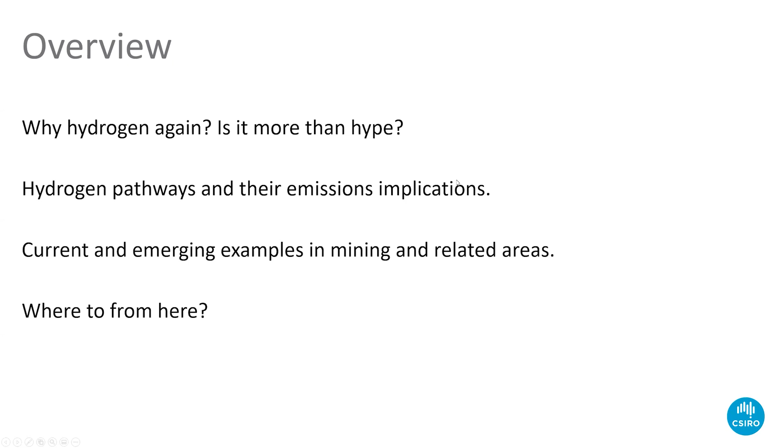This is the overview of what I'm going to step through today in this info call. People often want to know why we're talking about hydrogen again, and if it's real this time. Is it more than hype? I'll take you through what I think is the answer to that question. I'll talk a little bit about some of the pathways that are emerging, their different implications with regards to emissions, and how some of those are panning out in some of the sectors of relevance to the people who might be dialing in to listen to this. We are a research agency, and so we do like to finish these discussions with where to from here, because we wouldn't be heavily invested in spaces which were ready to go and didn't have any more work to do.

So hydrogen energy systems, depending on what you've been doing or where you've been casting your mind, have been around for quite some time. But really, their use in an industrial scale has been as a feedstock for many years, 100 years or perhaps even more. And that industrial hydrogen use has been largely in sectors around oil refining, production of ammonia for fertilizers and explosives, methanol production, and a whole range of other applications. In those scenarios, it's usually produced in the industrial complex, in the oil refinery, in the Haber-Bosch plant, for example, where it's needed. And that production is usually from steam reforming of natural gas or the gasification of coal. And that has associated with it a lot of CO2 emissions.

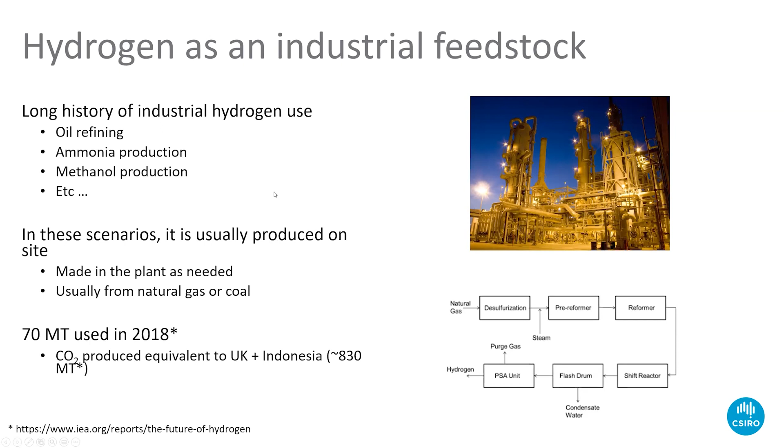And when we talk about hydrogen in the modern energy context, we're talking about hydrogen for different uses. Although, as we move down the decarbonisation pathway, those existing applications of hydrogen have the chance to contribute to emissions reduction as well. Hydrogen energy usually leads people to think about mobility, cars, perhaps buses if they've been in a city which has had a bus trial in the last decade or so. And that's certainly the case, but it's much more than that now. And it transcends industry sectors.

It links into domestic use, electricity and grid uses, a whole range of industrial uses, and of course opens up this prospect for countries which are endowed with significant renewable resources to store and export that renewable energy as the world seeks to decarbonise. So it's broad and it's complicated, and almost every sector that has energy and emissions associated with it has a chance to have at least some benefit from what's emerging in the hydrogen area.

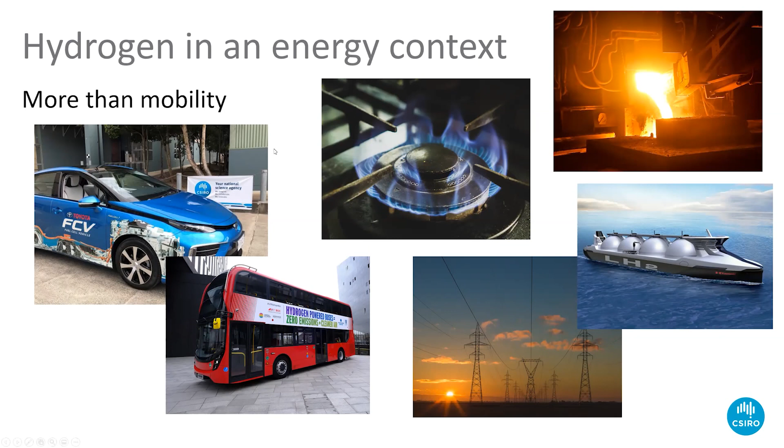Why, though, are we talking about hydrogen again? And depending on how long you've been around, will depend on how many times you've had hydrogen thrust upon you as a solution. Many of us think it's different this time, and a few things have changed, I think, to support that.

One is this notion of global market pull. Japan and Korea, for example, have got energy strategies which rely heavily on imported low carbon hydrogen to achieve those goals. Germany even wants to look at importing renewable hydrogen from Australia as part of its plans to transition and decarbonise.

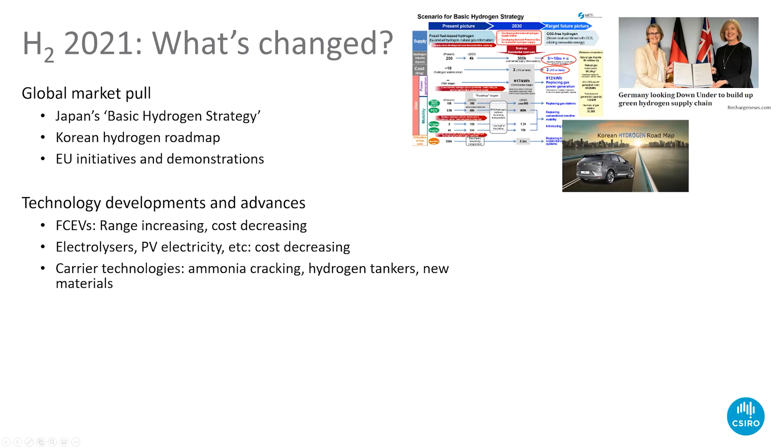And these strategies are emerging because we're seeing fairly mature technologies in some key areas. Fuel cell electric vehicles: the fuel cell itself has become efficient and light. The tanks to store the hydrogen, some of the materials advances there have been quite significant. And we now see fuel cell electric vehicles on the streets in cities around the world.

Making the hydrogen from non-fossil fuel sources has also become achievable in terms of the cost of electrolyzers, in particular the PEM electrolyzers, which are somewhat flexible and modular and distributable in the context of renewable energy and grids. And we, of course, know that the costs of renewable electricity generators have come down significantly.

I guess the other aspect of that is this notion of storing and moving it around. And we've seen some technologies emerge there around liquid hydrogen tankers, new materials for storage, ammonia pathways are now real. And this opens up the prospect of storing and moving the hydrogen around at costs which are now in that range of being on the trajectory, I guess, for many strategies and plans.

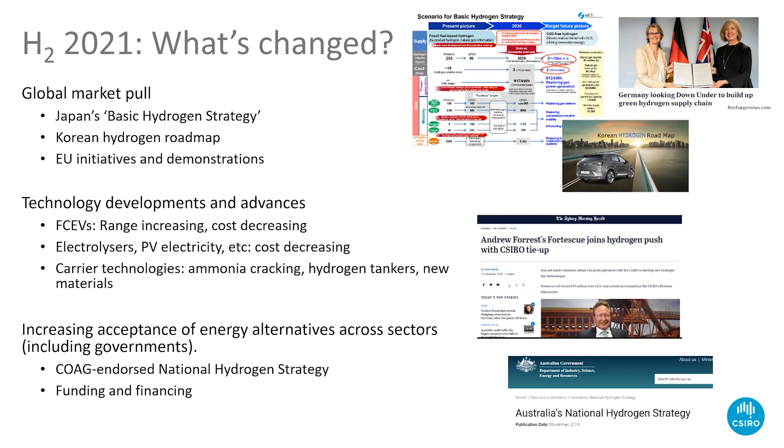And this is all happening in the context of a bit of a shift, I think, in what people want to see in terms of the emissions intensity of their energy. This is reflected here in Australia, where there is now a national hydrogen strategy endorsed by all of the states. The federal government is supporting hydrogen demonstration through grant funding and investment activities through our so-called Green Bank.

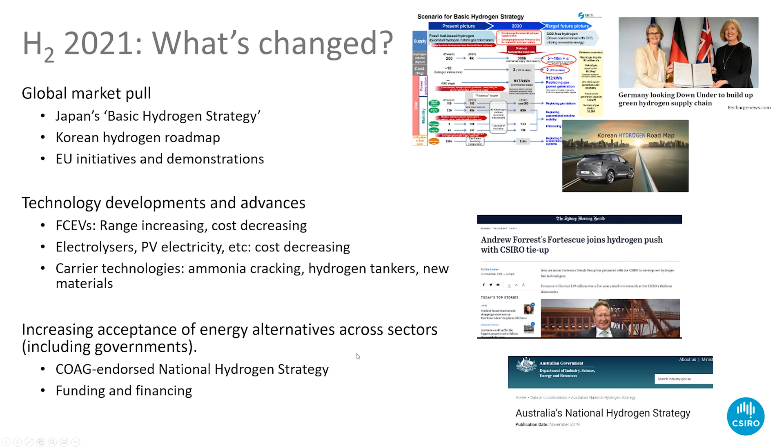And we're seeing companies such as Fortescue quite famously pivot from being an iron ore company to a company with ambitions to be a global scale green energy company. And so all this together really does make many of us think that this time it's probably for real.

It's worth touching on the different pathways available to us. The pathway for hydrogen production that I mentioned at the outset, where we make hydrogen from gas or from coal, is nowadays called grey or black or brown, depending on which version of gas or coal it's made from. That, of course, is not usually consistent with the notion of hydrogen as a clean energy transition option because of the CO2 emissions associated with it.

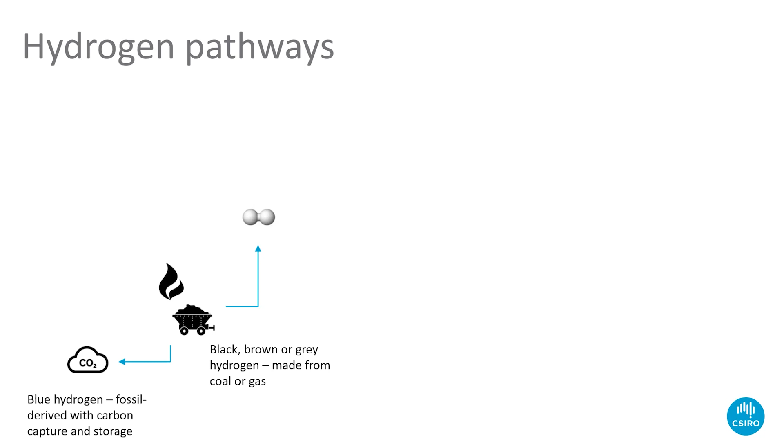And so if those emissions are to be captured and stored or used, then the hydrogen produced is called blue hydrogen. And there's a lot of interest in blue hydrogen, in particular from natural gas companies who are trying to figure out how best to navigate a future which is likely to be featuring hydrogen significantly.

I think most of the interest, though, in terms of hydrogen as a long-term decarbonisation vector is what's called green hydrogen, which is hydrogen made from renewables. Now, most of that is renewable electricity driving an electrolyzer to make hydrogen. There are some pathways where we can take renewable waste streams such as agricultural waste or wood chip waste or even urban waste and turn that into hydrogen. But certainly most of the interest is around this electrolysis pathway.

And that's where we're seeing a lot of advances in electrolyzer technology, in terms of cost and scale. And that's going to continue to go down and increase respectively as we see more and more deployment. Once you've made this hydrogen, of course, we can do lots of different things with it. It can be used as an energy storage pathway.

It could function in a grid a bit like a battery, but for much longer storage timeframes and potentially longer generation timeframes as well. And I guess the benefit there is twofold. Electrolyzers are pretty flexible loads on the grid, so they can actually be used to help balance out demand by turning them up and down as renewables come and go, but also as a generation pathway in its own right.

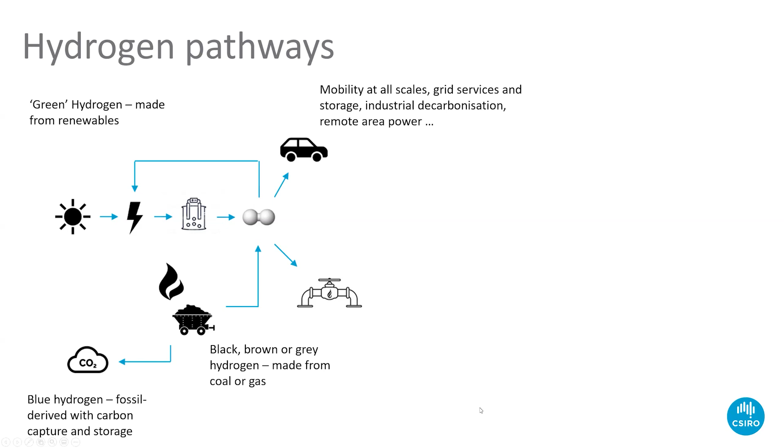And of course, there's this notion of storing hydrogen, either as ammonia or methanol or methane, liquid hydrogen or organic hydrogen carriers. There's a whole range of options here, and transporting it around the world. And the prospect of a renewable energy export industry is really piquing the interest of many in this space.

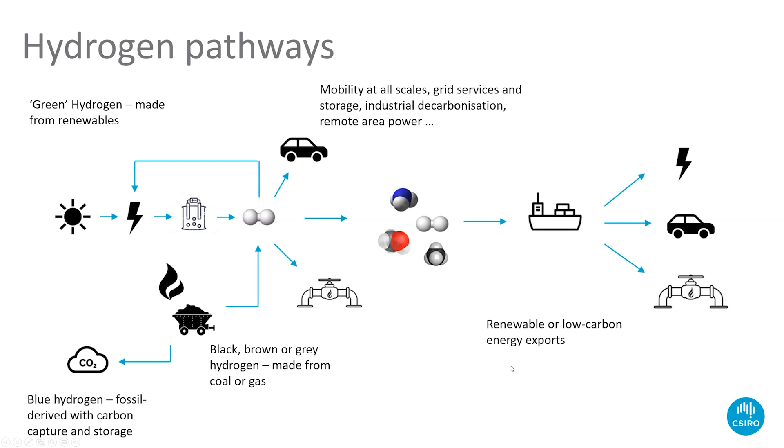When we turn to mining, that story is consistent, and there are some really interesting things emerging in this space. I don't think anyone tuning into this session will not appreciate the energy demands of mining, and especially in Australia, where we see a lot of use of diesel, which, especially when we consider the remoteness of some of these mine sites and the off-grid nature of them, is very costly, it's quite CO2 intensive, and there are other issues around the use of diesel, which go beyond carbon and cost.

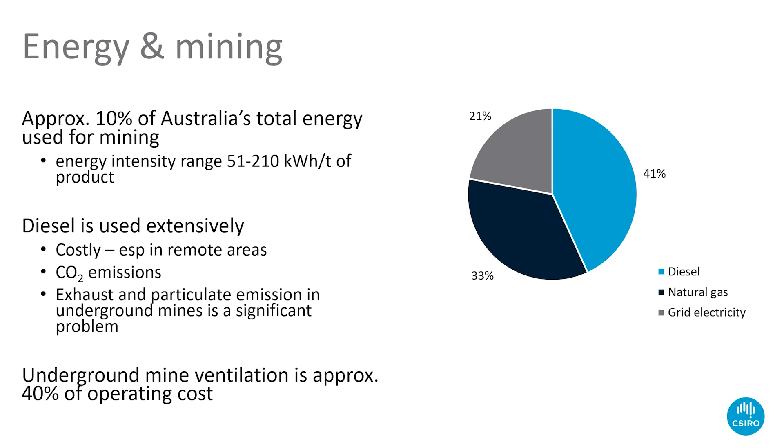And so we are seeing some early movement in the mining sector around uptake of hydrogen technologies. And this is in part because it's a fairly high cost competitor in that space already. I think some of the applications for hydrogen, where the incumbent has a smaller margin associated with it, things such as natural gas replacement in some manufacturing industries, might take a bit more time and might need the costs to come down. But certainly mining is amongst the early movers in this space.

And we see that in things such as the development of hydrogen-powered mining trucks. There's some conversion projects going on around the world. This is particularly amenable to those trucks which are the hybrid diesel electric drivetrain, and that has an analogue in rail as well, where we're seeing some conversions and some demonstrations, in particular in Europe, around hydrogen-powered rail.

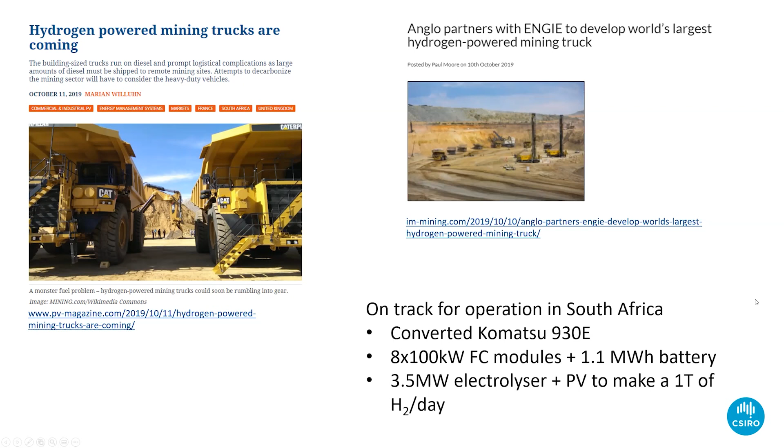The prospect of producing the hydrogen on site and using it to power some of these very large vehicles is really quite interesting. Here in Australia, we're seeing some early movement by Fortescue, not so much at the moment, at least, in their large heavy haul vehicles, but they are now going down the path of using hydrogen in some of their coaches for moving people around their sites.

Now, it's a fairly useful place to start, I think, as they develop their own familiarity with some of the technology combinations needed to deliver a renewable hydrogen transport fleet, and also allows them to build on some really strategic partnerships with various players in the hydrogen space, including, of course, CSIRO, as they partner with us to commercialise some key technologies across the value chain.

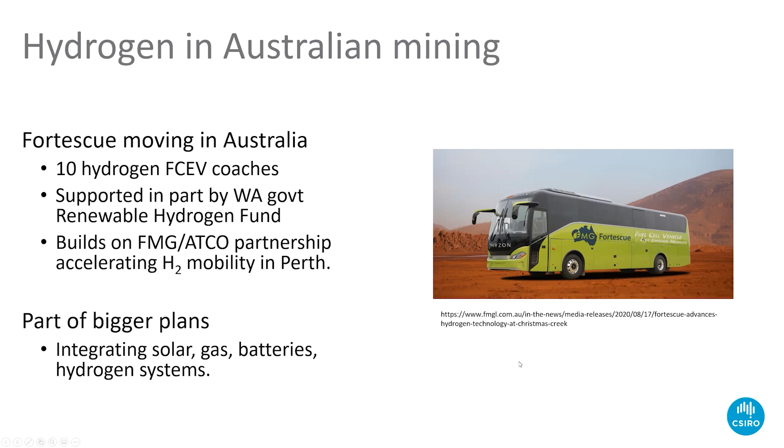I always like to show this example when I'm talking about mining, and even more broadly hydrogen, because it shows that we're not necessarily talking about a competition here between different storage technologies or different mobility technologies. And the future really is in looking to all the technology options that are available to us and hybridizing them to find the sweet spot. And the Glencore Raglan mine up in Canada, I think, is a great example of that.

It's got a couple of megawatt scale wind turbines in, I think, a 29 or 30 megawatt microgrid, which runs the mine. And those wind turbines are hooked up to a multi-technology energy storage system, which of course has a hydrogen system, like I touched on earlier, with an electrolysis and a storage component, along with a fuel cell generation component, but also a flywheel and a battery.

And together, those three approaches to storage really do offer them the reliability and flexibility to show how we can integrate some of these technologies with intermittent renewables and have a big impact on things like, in this case, millions of litres of diesel a year. So I think that's a really great story, and there are analogues for that, I suspect, all around the world.

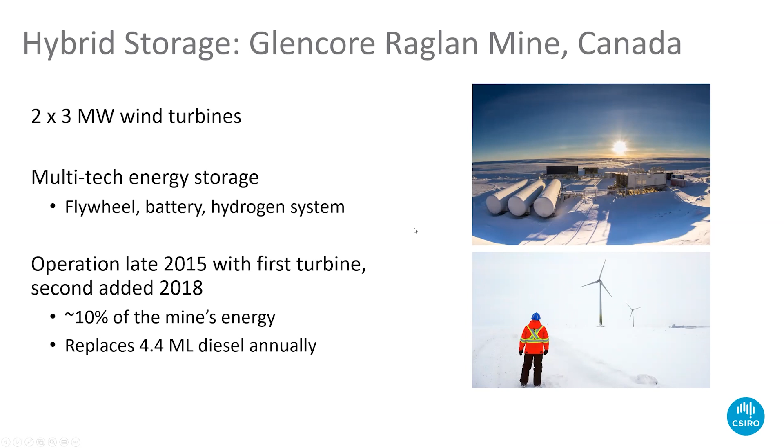People do talk a lot about green steel, and that's certainly a tantalizing prospect. I think more broadly, the iron and steelmaking sector can benefit a lot from some of the opportunities that hydrogen affords, not just in the steelmaking itself, but also more broadly. And I think some of the quality increasing activities around iron ore beneficiation, which rely on natural gas and thermally driven processes, are fairly amenable to conversion to hydrogen.

The traditional steelmaking path using a blast furnace, we have seen coming out of Europe already some demonstration activities of hydrogen being used, but of course, blast furnaces are difficult to go green, as it were, because of the reliance of that technology on coke and some of the carbon implications of that. While hydrogen is a very good heat source and a very good reductant, it's difficult for it to fulfill some of those structural properties of coke in the blast furnace. So there's some other innovation required there.

But certainly by using hydrogen to increase the quality of what goes into a blast furnace, and perhaps in the tuyeres as a heat source, which is what we've seen in Europe, there's an opportunity for some quite significant CO2 reductions. The emerging steelmaking pathways, such as electric arc furnace, linked up perhaps or separate from direct reduction of iron, are very amenable to hydrogen. These low temperature reductions are quite suited to hydrogen, given its strongly reducing nature. And of course, when linked up with an EAF run on renewable electricity, that's where the opportunity for zero emission steel can be realised. So lots to think about there.

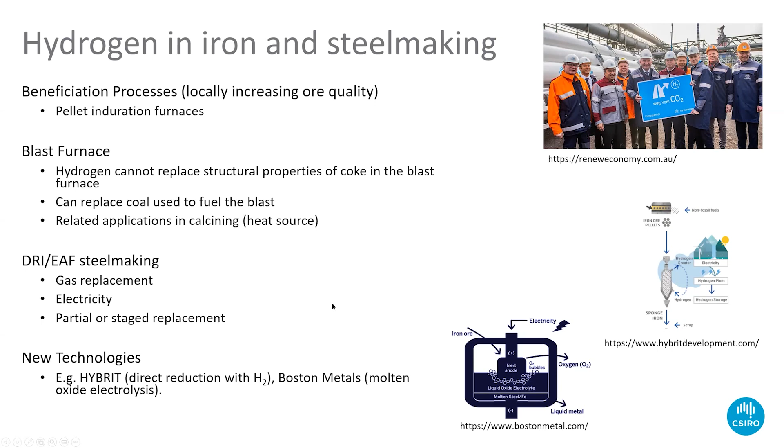Gas networks, I've stuck in here because it shows how it doesn't need to be green or nothing. Some of these demonstration projects here in Australia are taking green hydrogen and injecting it into natural gas grids at a few percent, just to become familiar, I guess, with the production stage. But that's supporting a reasonable emissions reduction across their networks without changing infrastructure. And these projects, as they grow, will seek to transition some of these gas applications from a few percent renewable hydrogen to much higher percentages. And again, there's analogues for this around the world, in particular, for example, in the north of England.

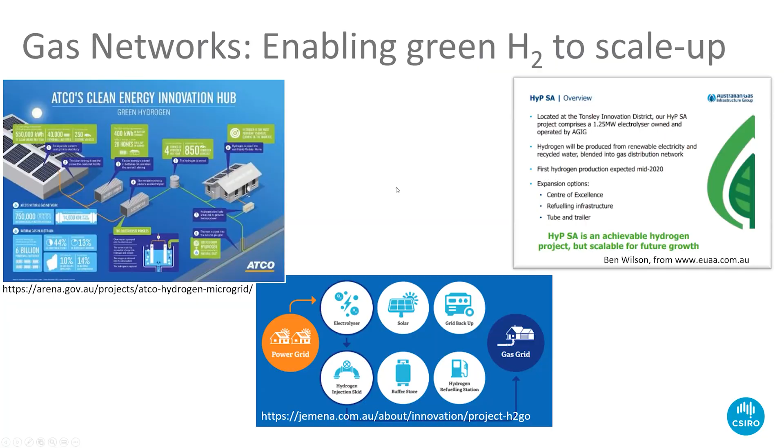On top of the existing uses of hydrogen, which I've spoken about around oil refining and ammonia production, we see this significant growth in green or low carbon hydrogen in those application spaces that I spoke about. A 10 times increase in what we saw in 2015 in terms of hydrogen use. Almost all of that required to be carbon free, which is either renewable or one of those fossil sources of hydrogen coupled with CO2 capture and storage.

Now, there's significant discussion and debate around the value of a so-called blue hydrogen pathway to support a cost-effective transition. Lots of people think that's a really important part of doing it. Others suggest that if it's not green, it's not worth doing. And there are a range of perspectives in between that. But the point is, we're going to need a lot of hydrogen. And if you sit back and think about it, that's an awful lot of windmills and PV to support that.

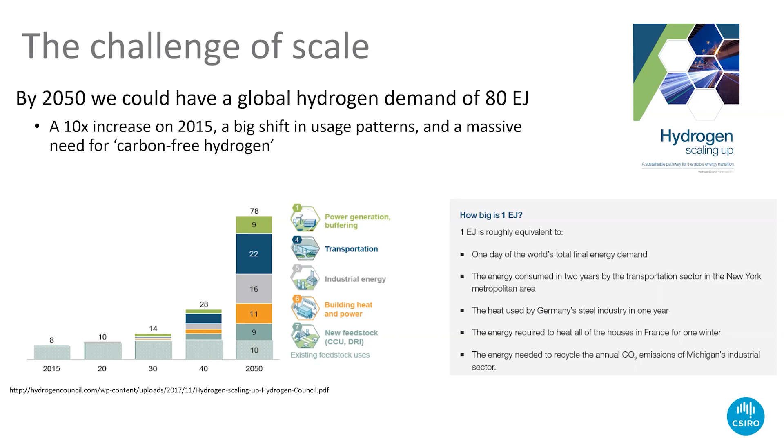And so what we're looking at in terms of our R&D supporting some of these technologies is around cost reduction. That's a critical aspect of becoming competitive with some of the incumbent technologies. But it's also about reducing process steps and increasing the efficiencies of some of these pathways so that we can make the hydrogen that we need with less demand for renewable energy. That's going to get us part of the way. Diversification is also going to help by bringing together sectors that haven't traditionally worked together. It's the chance to really broaden our base for hydrogen production.

A good example that I like to talk about is the waste management sector, where there's a range of pathways for waste management of all kinds to participate in low carbon hydrogen production, as well as making hydrogen to serve the demand. This is a really interesting way of perhaps even shifting the economics of waste, of emerging waste management pathways, to really up the game in that sector as well. So some interesting stuff there.

But of course, demonstration, doing some of this stuff at scale, de-risking supply chains and showing that it's possible is really what has to happen. At CSIRO, we're doing our bit via our recently launched hydrogen industry mission, and with our partners in industry and government, really hoping to see some of these large projects which are now being planned in Australia, both for renewable hydrogen production in ammonia applications, but also in natural gas and mobility applications, really come to fruition.